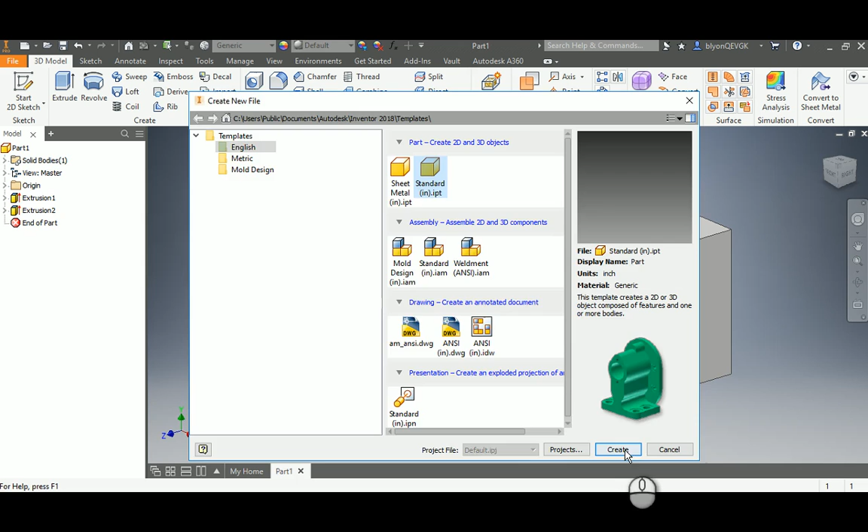English standard, great. We have our blank space here, so like everything, we start with a sketch. Just to change things up, I'm going to choose my XY plane, my front face. Okay, so now I can see the front. And I'm going to sketch a rectangle.

Okay, so right here, I'm going to start at the origin. Click. Remember, don't click and hold it. And I'm going to drag it over. And I'll put some dimensions here. So I know the width of this would be 1.5.

And remember, if it zooms off your page, you can always rezoom. And I know the height of this would be 3/4 or 0.75. I can put in either. And it changes it. Okay, so I'll finish the sketch.

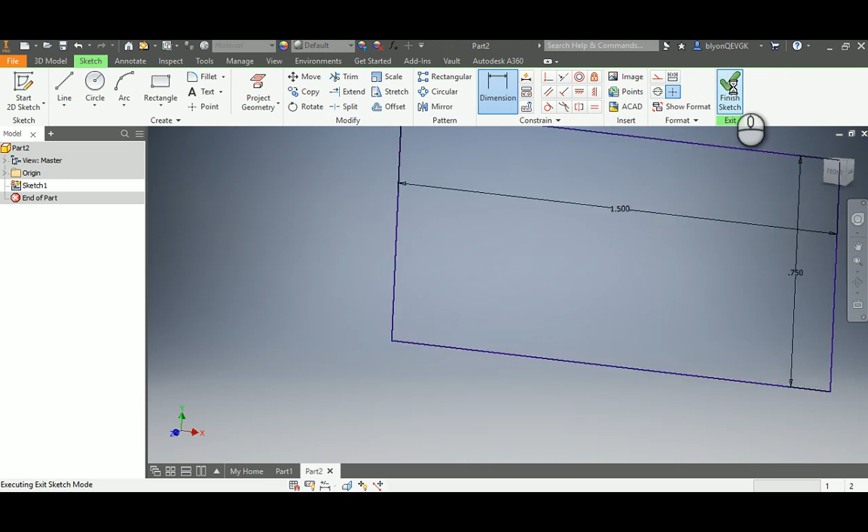And I'll use my extrude tool just the same as we did before. So for this, I want to extrude 1.5 inches. Okay.

And if I look back, I need to get rid of that corner. Okay, so I could have done this just with the line tool, as we've done before, but I just wanted to show you a different way of doing it.

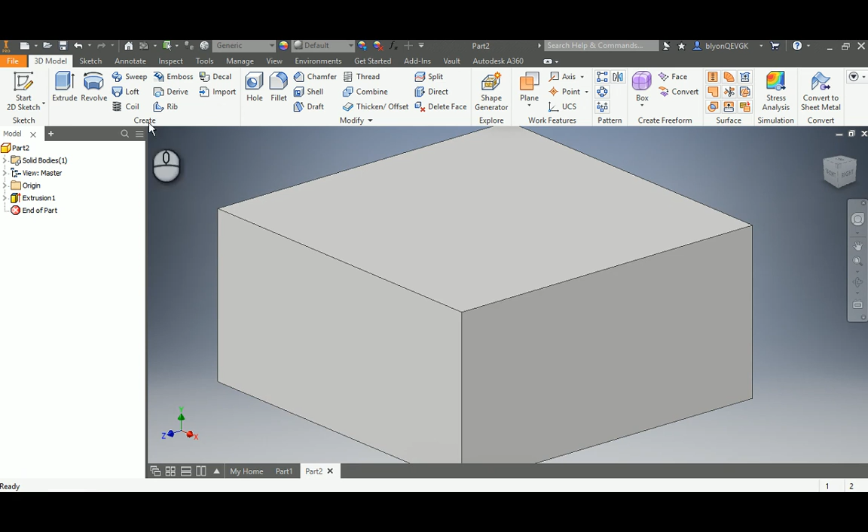So if I sketch on the top face now, I can sketch that area. So I'll rotate it around. I need to sketch the area that I want removed. So I'm again going to use my rectangle tool, and I'm going to hover right over the corner. Okay, turns green. Click, pull it up.

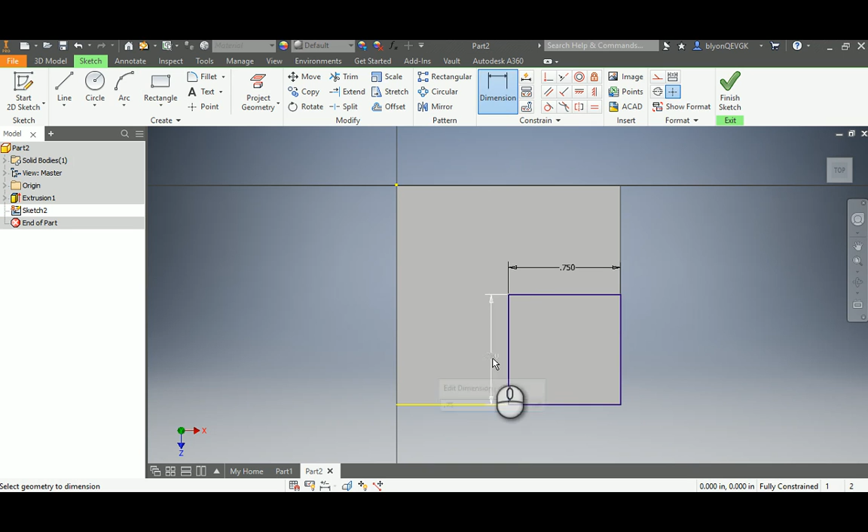I know it's going to be about 3/4 on the side, and I can give it some dimensions. So I know this will be 0.75, and I know this will be 0.75. Okay, everything's defined. Everything's blue. I'll finish the sketch. Okay.

Now, if you click on your extrude tool, it's going to assume you want to add more material. So if I zoom out, you can see it wants to create this piece. Okay, but there's another option that you have. So the first option is kind of the default one. It's the join option. But right beneath that, there's the cut option.

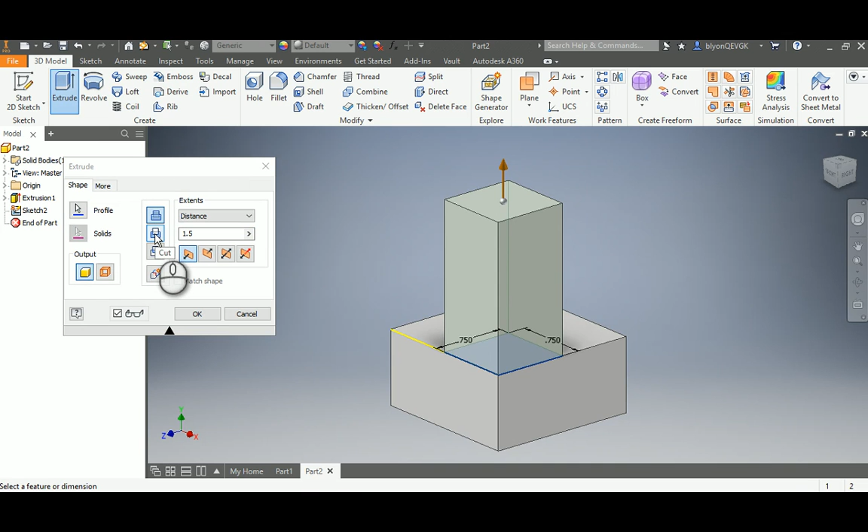Okay, so if I click on this, it's going to cut away. And remember, since my last value that I used was 1.5 inches to do the first extrusion, it defaults to that. Now you can see in this cutaway, it actually cuts even farther than the part is. Now that's not going to be a problem, but if there was something that we wanted to cut a little bit into the part but not all the way through, then we'd have to change that.

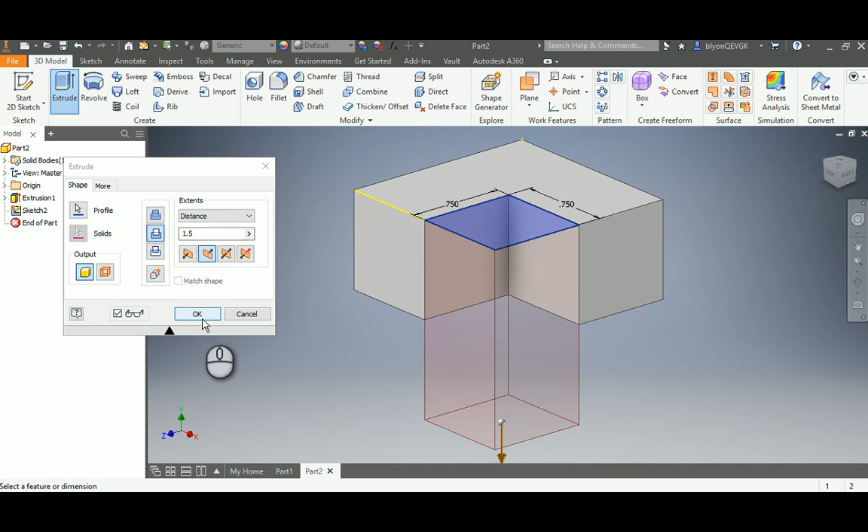Okay, so click OK, and you see that we have our part right here. And again, File, Save to your U drive if you have one, and the period number, so I'll just use 0, my last name, and then C67. Save.